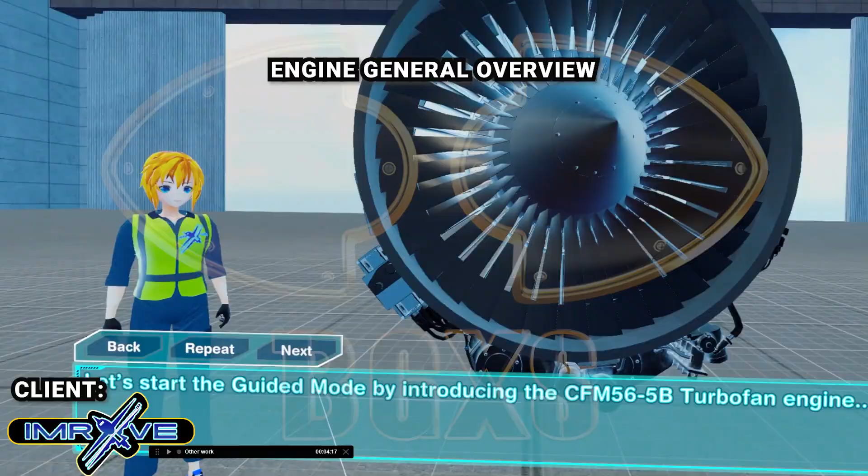Let's start the guided mode by introducing the CFM 56-5B turbofan engine, developed by CFM International, a joint venture between GE Aviation and Safran Aircraft Engines. It is widely used to power the Airbus A320 family of aircraft.

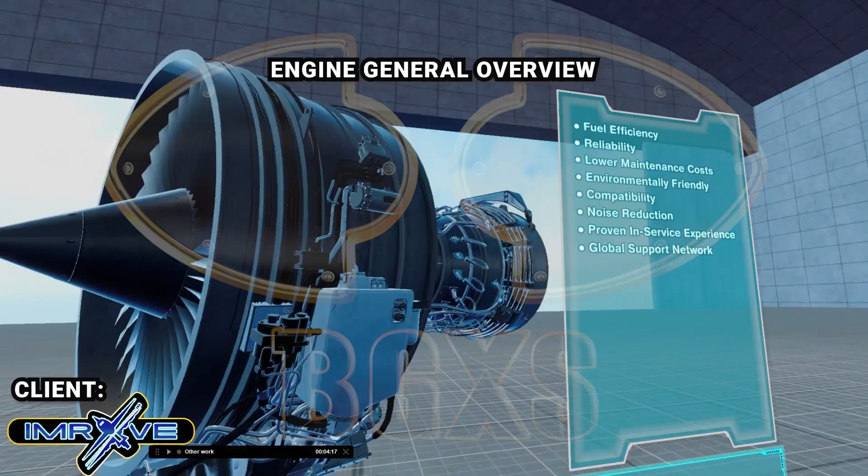The advantages and benefits of the CFM 56-5B include fuel efficiency, reliability, lower maintenance costs, environmentally friendly, compatibility, noise reduction, proven in-service experience, and global support network.

So, let's discuss the CFM 56-5B engine performance and specifications. Please click the CCTV icon so that you could observe the engine closely while it's running and see how the engine performs firsthand. Caution! Remember to avoid the danger zone while the engine is running. This will pose a great risk and might cause death.

For the CFM 56-5B specs, it has a thrust range between 22,000 to 33,000 pounds. Bypass ratio is approximately 6:1.

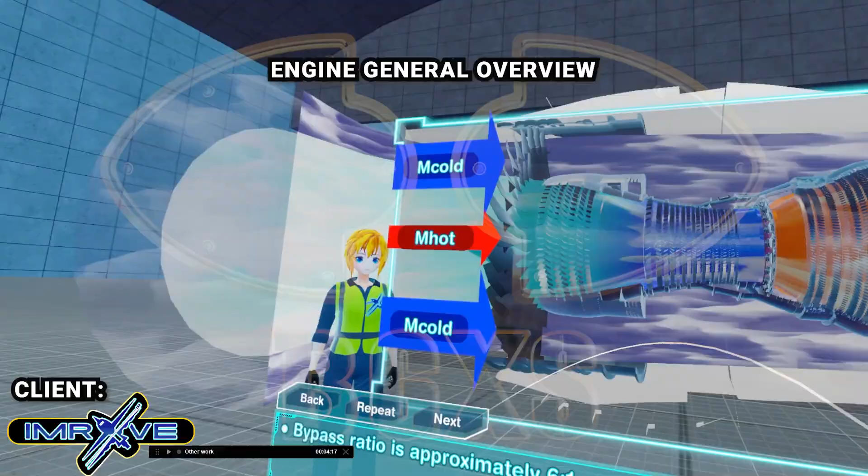Fan diameter is 68.3 inches, or 1.73 meters. Overall pressure ratio is up to 33:1, depending on specific engine variant.

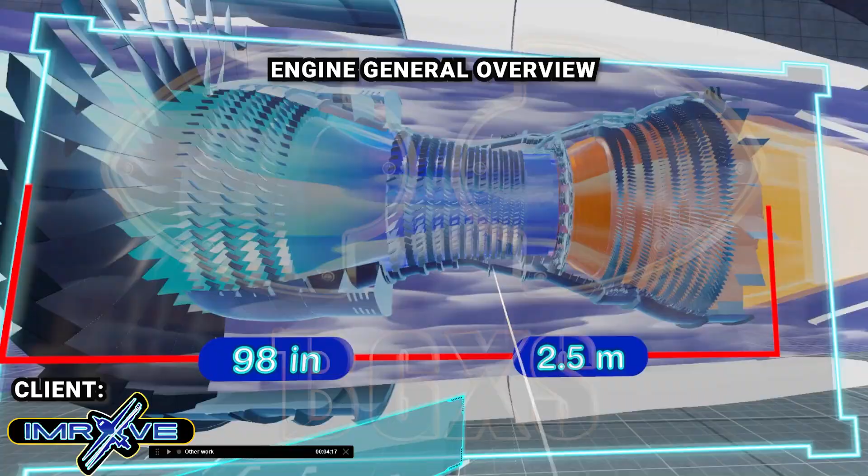Length is 98 inches, or 2.5 meters. Dry weight is 2,300 kilograms, or 5,100 pounds.

Fuel efficiency is designed for optimized medium-haul operations with low specific fuel consumption, or in short, SFC. Noise compliance meets ICAO Stage 4 and Chapter 14 Noise Regulations.

To know how a CFM 56-5B turbofan engine works, let's observe how it operates. To propel an aircraft forward, thrust is required, which is generated by accelerating air from the front to the back of the engine. This is done by the large fan at the front of the engine, through which the air passes at a high rate.

The fan then includes a fan rotor, fan case, and inlet. It draws volumes of air, most of which bypasses the core, contributing to thrust and efficiency.

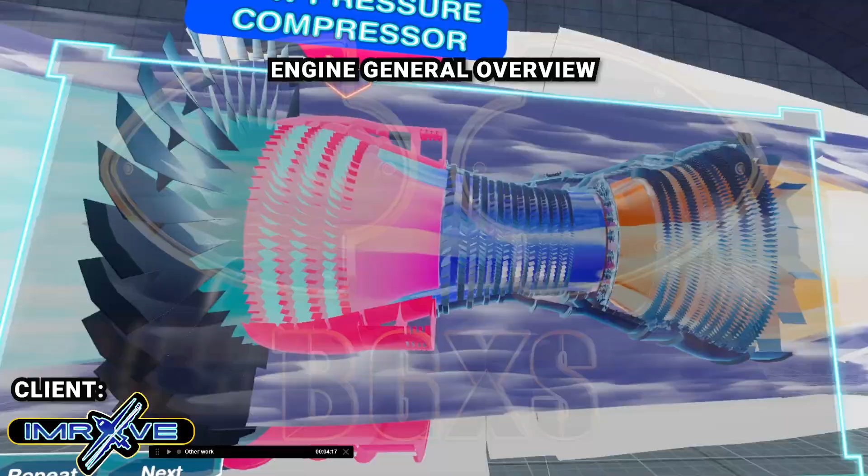The low-pressure compressor, LPC, is composed of 3 axial compression stages. It increases the pressure of the incoming air before it enters the high-pressure section.

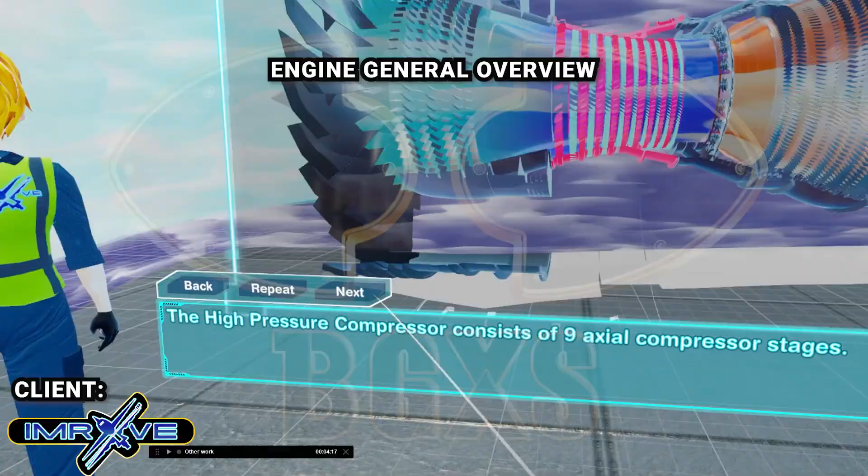The high-pressure compressor consists of 9 axial compressor stages. It compresses the air to a much higher pressure to create the correct conditions for fuel-air mixing and combustion.

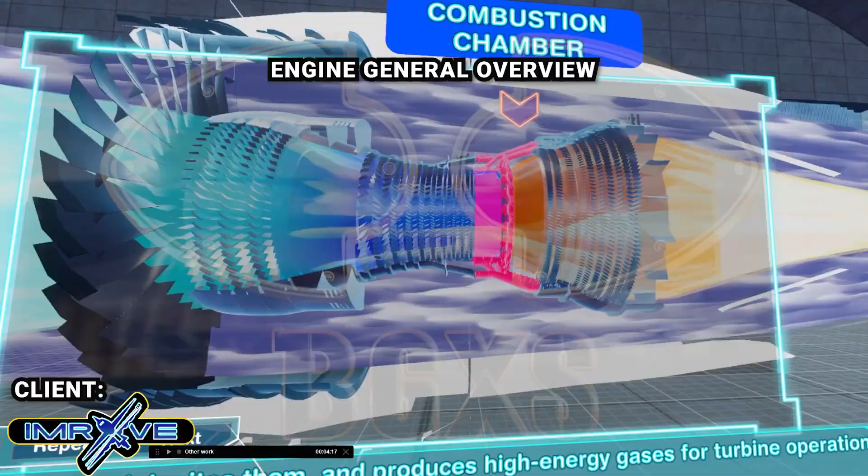The combustion chamber, annular, with fuel nozzles, liners, igniters, and cooling systems ensuring durability, mixes air and fuel, ignites them, and produces high-energy gases for turbine operation.

The high-pressure turbine includes blades, vanes, discs, and a cooling system to handle extreme temperatures. HPT extracts energy from combustion gases to drive the high-pressure compressor upstream.

The low-pressure turbine includes blades, vanes, discs, and shafts designed for high efficiency and durability. LPT extracts energy from exhaust gases to drive the fan and low-pressure compressor.

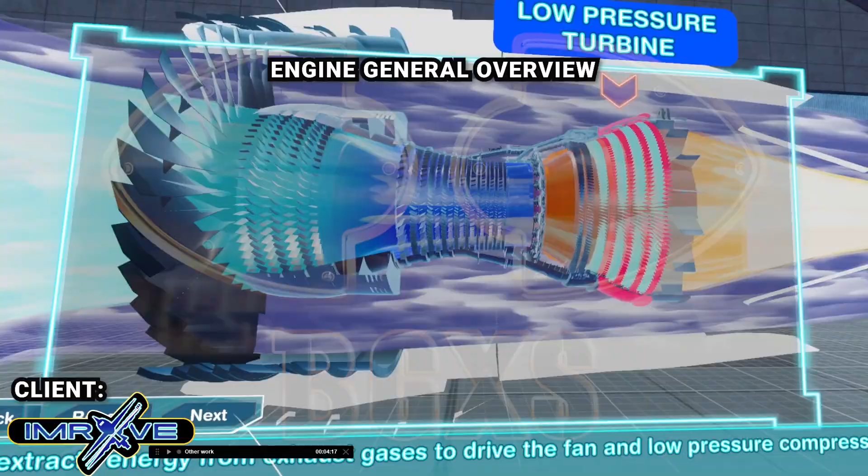The turbine rear frame consists of structural supports, outlet guide vanes, and thermal shielding materials for durability. It directs exhaust flow, provides structural support, and houses bearing systems for engine alignment and stability.

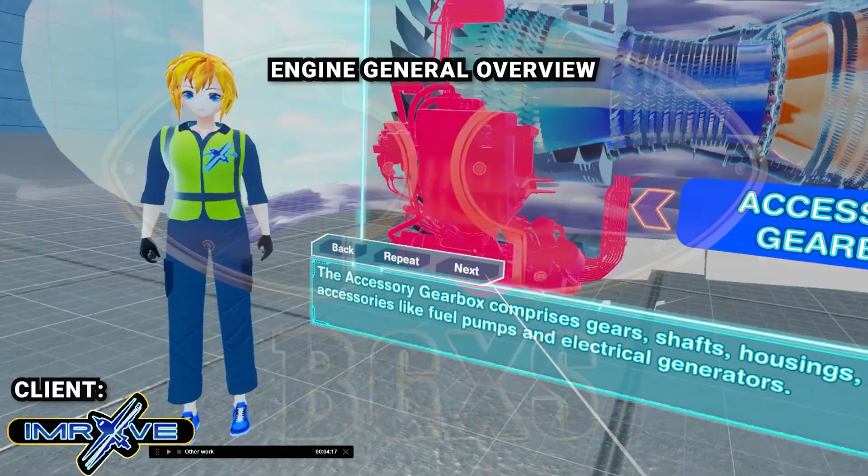The accessory gearbox comprises gears, shafts, housings, and mounting points for accessories like fuel pumps and electrical generators. It transfers engine power to drive essential systems, including oil pumps, fuel pumps, and generators.

That concludes our CFM 56-5B General Overview Training Module Guided Mode. Do you want to go back to repeat the guided mode, proceed to the refresher mode, or go directly to the test mode?

Let's refresh what you have learned in the guided mode. No worries, Aviator. If you're lost, just click the in-app menu button at the left-hand side of your joystick and follow the step-by-step guide. We will first review what you have learned about CFM 56-5B engine performance and specifications.

Who developed and manufactured the CFM 56-5B turbofan engine? From the 20 jumbled terms, can you put the 8 advantages and benefits of CFM 56-5B in the toolbox icon?

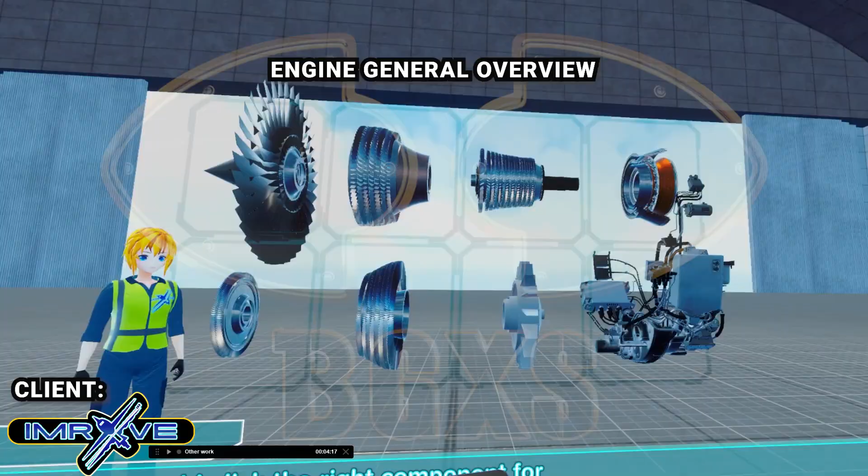You're right. For this test, you could click the right component for your answer. Let's start the question. Includes blades, vanes, discs, and a cooling system to handle extreme temperature.

Nope, that is not right. Includes blades, vanes, discs, and a cooling system to handle extreme temperature.

That's right, you nailed it! Transfers engine power to drive essential systems, including oil pumps, fuel pumps, and generators.

Indeed, you're spot on! It draws volumes of air, most of which bypasses the core, contributing to thrust and efficiency.

Indeed, you're spot on! Comprises gears, shafts, housings, and mounting points for accessories like fuel pumps and electrical generators. That's right, you nailed it!

Mixes air and fuel, ignites them, and produces high-energy gases for turbine operation. Okay, you're right! Extracts energy from exhaust gases to drive the fan and low-pressure compressor.

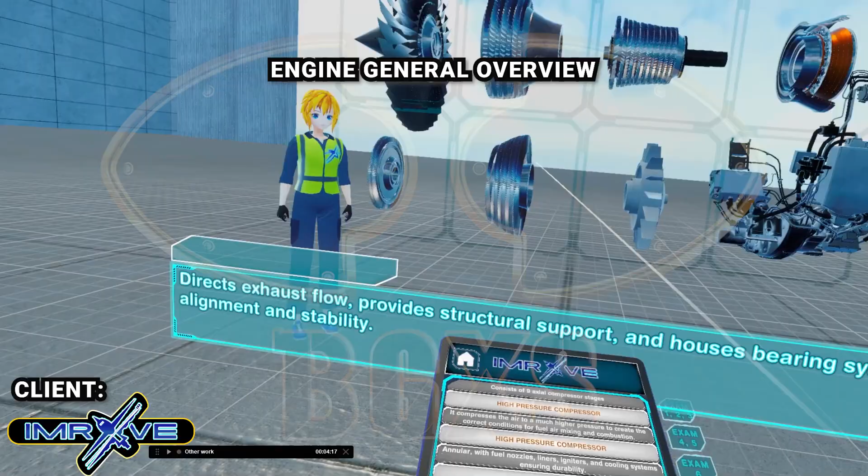Okay, you're right! Directs exhaust flow, provides structural support, and houses bearing systems for engine alignment and stability. Yes, that's correct! Consists of structural supports, outlet guide vanes, and thermal shielding materials for durability.

Indeed, you're spot on! It compresses the air to a much higher pressure to create the correct conditions for fuel-air mixing and combustion. That's right, you nailed it!

It includes the fan rotor, fan case, and inlet. Absolutely, you got it! Includes blades, vanes, discs, and shafts, designed for high efficiency and durability.

Oops, you're wrong! Includes blades, vanes, discs, and shafts, designed for high efficiency and durability. That's right, you nailed it!

Composed of 3 axial compression stages. Absolutely, you got it! Consists of 9 axial compressor stages.

Absolutely, you got it! It increases the pressure of the incoming air before it enters the high-pressure section. Absolutely, you got it! Extracts energy from combustion gases to drive the...